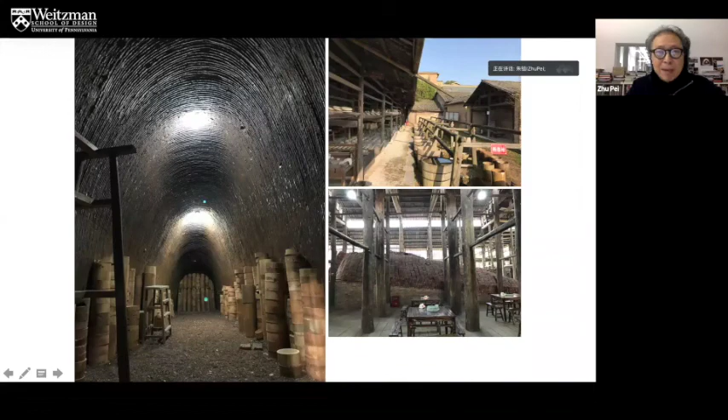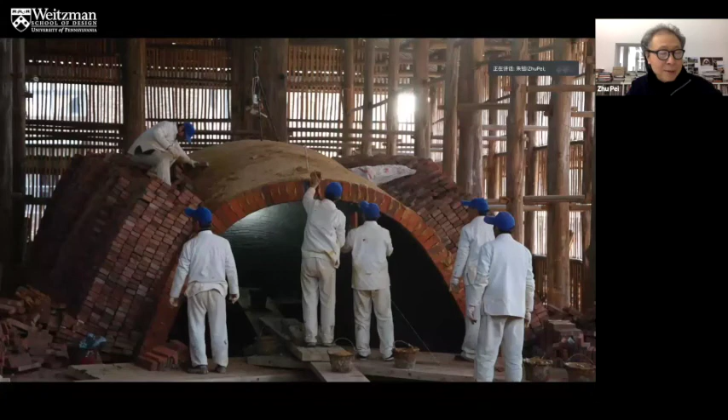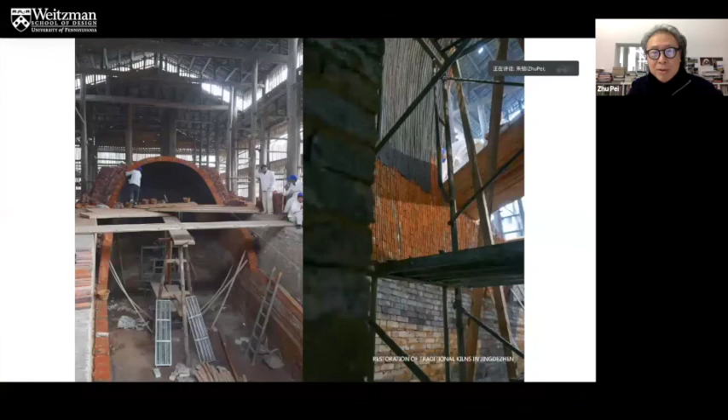This is quite interesting — when I walk around the city, especially inside the historical area, you always find a lot of traditional brick kilns. Sometimes they are reconstructed, because those kilns have been demolished maybe 80 times — probably after a maximum of 2 years they have to demolish them. So this is one brick kiln, with the craftsmen working on it. This is a construction site.

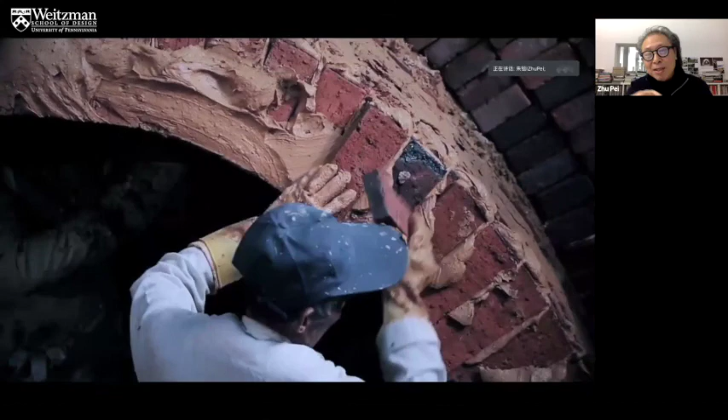I was fascinated by the way they make this brick. They use very thin bricks to create a special form, cutting through to make the horizontal layer. You can see the brick is thin and light, so they use special mud to hang the brick. They build this brick dome without scaffolding, just by hand. This is their very special technique — not like the way we normally understand how arches are built.

This kiln is not only for producing porcelain, but also a lot of people gather along this kiln area, especially during the winter season. For example, some schools move adjacent to this brick kiln in order to take advantage of the warmth from the kiln.

A lot of social activity also happens here, with many people working on various things. In some small cases, people just take a break, put down their school bag, and can keep warm all day long.

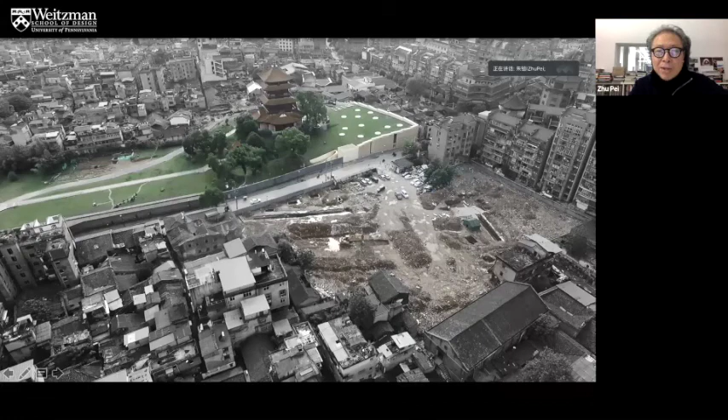That's adjacent to the Imperial Park. So this is like an Imperial Ruin Park, surrounding a lot of historical housing. And if you go beyond, you're going to see the factory, maybe from the early of last century, a lot of social housing nearby. So surrounding this area actually has a very rich urban fabric.

So this shot was taken after this museum had been done. We look from the southeast to beyond. This is the Chang River. But you can imagine if you go back like 200 years ago, a lot of people just walked through this small alley, went to this Chang River in order to transport their porcelain to the boat. They also brought back porcelain clay, wood, and so on, in order to make their porcelain in the brick kiln. So this is in general the Jingdezhen lifestyle.

But another interesting thing for this area is that those houses always have a small vertical courtyard. They have huge overhangs, small alleys, probably because this climate is so hot - everybody has to stay inside, shading, protected from the rain, and so on. I think this is an intelligent idea. Actually, they gave me a lot of inspiration.

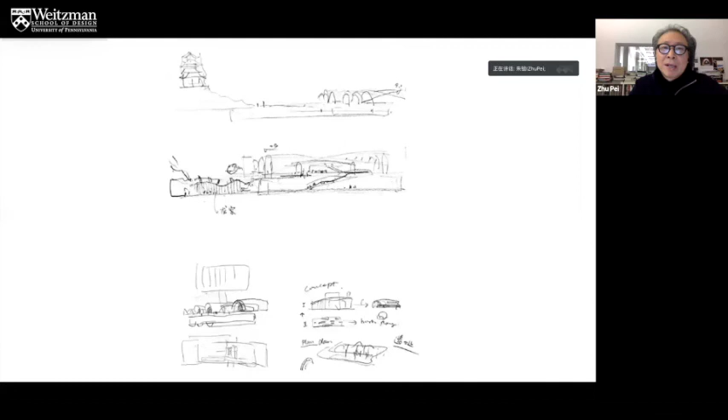So early in the concept, the idea that came to my mind was how I can catch up the sense of their brick kiln. This is going to be our project, the Imperial Kiln Museum. So this is an initial sketch to indicate what I thought - I tried to use this arched brick kiln structure to create a kind of new museum idea.

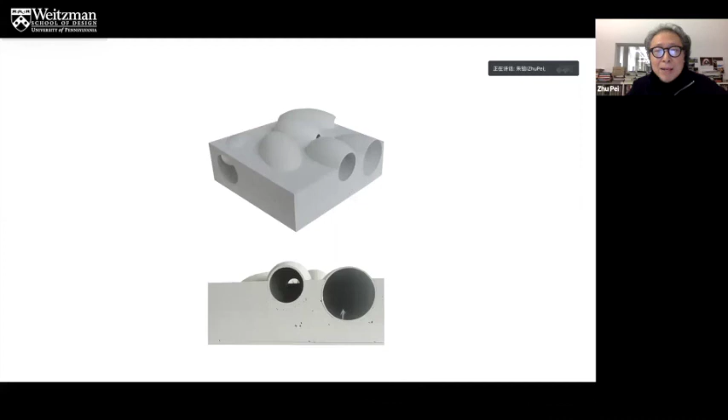So this is a preliminary idea, since we have many conceptual solutions. This is one of the ideas - we tried very hard to minimize the volume above ground. So this is our final solution, final concept for this museum.

Through this model, you can get a sense this museum somehow tries to stay small scale as much as possible in order to have a good relationship with its surroundings, like traditional housing, the factory. And so this scale is pretty much close to the traditional brick kiln in terms of scale, as I showed you before.

Now secondly, they also try to interlace it with a very rich urban fabric. This is in terms of the relationship with the urban fabric, the solution.

We have another big idea, which is I try very hard to make this design more sustainable. Also this idea may have come from the traditional housing adjacent to this area. This is like arched brick kiln layout from south to north in order to catch the summer wind, since the wind orientation is from the south. So basically you can see one tunnel after another, more like a wind tunnel, just wind can penetrate the whole building from the south to the north.

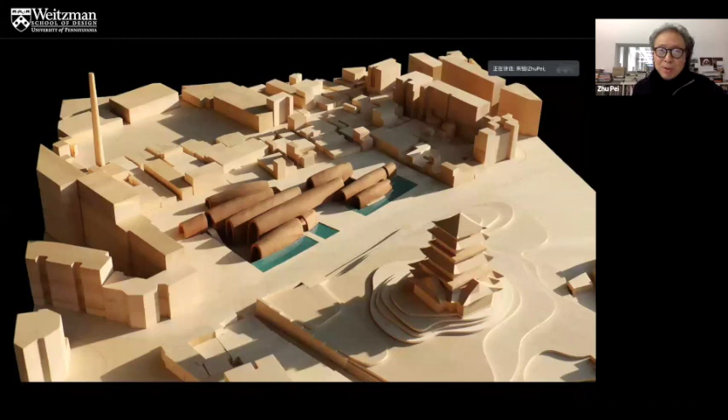Even today in the summer, we don't need to use the cooling system, air conditioning. So this is the first try to use passive energy ideas and apply them to this contemporary architecture.

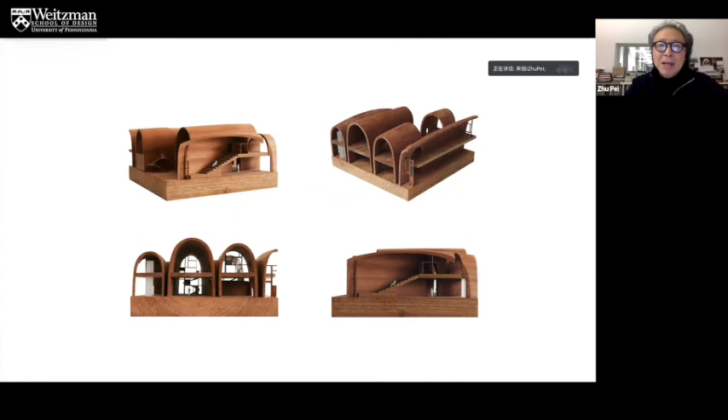Right, this is another concept model. Through the design process in the studio, we tried very hard not to rely on the computer for everything. I encouraged my staff to make models by hand instead of using the computer. So we built a lot of models, from small scale to bigger.

But this piece was collected by MoMA, definitely. So this is - I used porcelain to produce the local piece. It's more like, or it represents, our concept.

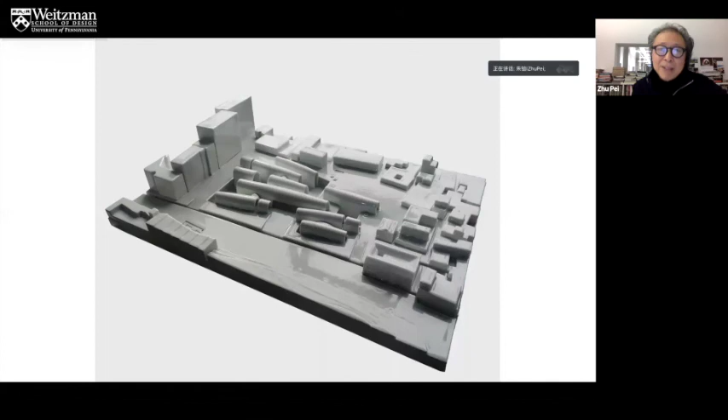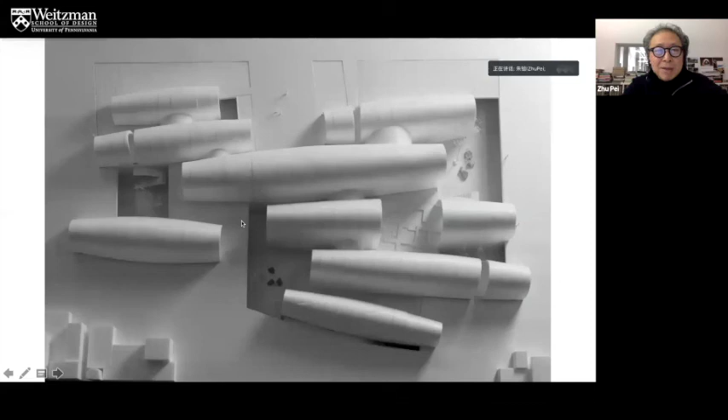You can see this building is laid out very freely in order to dialogue with its surroundings. Our site is so irregular. This is in general the big scale model, which is cut by hand. I talked to my staff.

We try to avoid using 3D print. A 3D printer can print everything, but we have to find a way to make this museum work as a system. If you look at this model, the arched structures are different not only in size but also in curvature. No one is the same, but how can you develop a system to realize them?

So during the conceptual design process, we used hand-made models, and this gave me confidence that we could find a way to build this museum as well.

So this is the major foyer and lobby for the museum. This is 2 arches, one is an open arch, another is more enclosed. This is the coffee, tea, book store. This is the auditorium, which has a separate, independent entrance. You can use it independently, pretty much at the boundary. So when people come to this museum, you can go through this other open arch to the content.

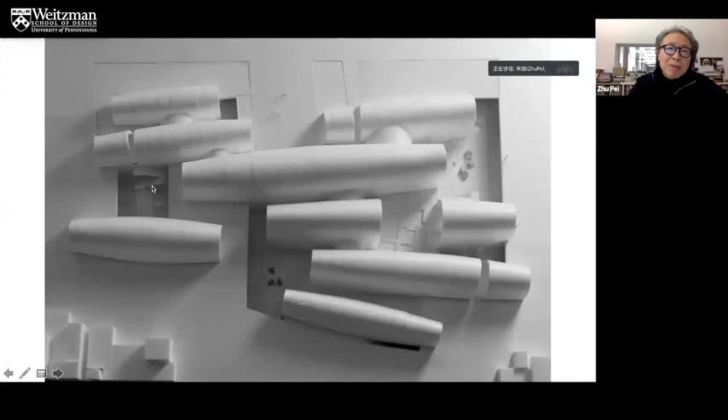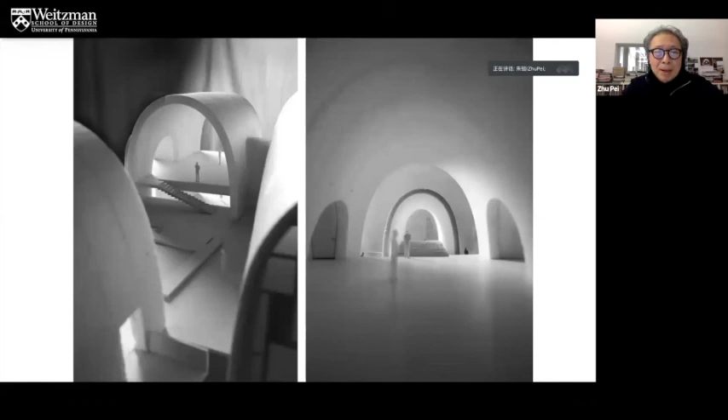You can see we have 5 courtyards, which integrate the overall museum. So this is the process, what we have done through this model made by hand.

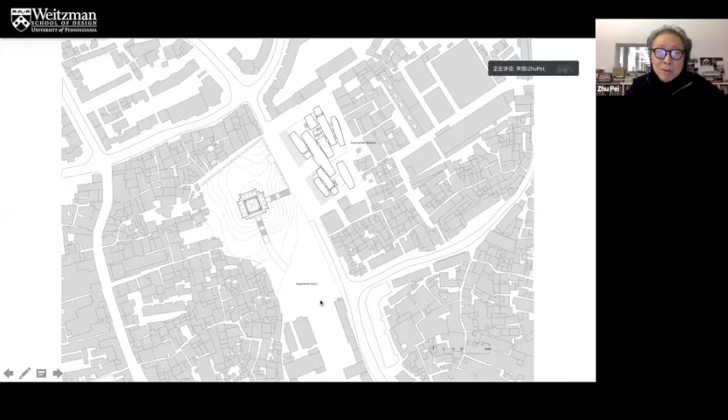This is the site plan. You can get a sense of the scale, the fabric. This is the ruin, Imperial Kiln. People walk through the ruin park, go underneath the green canopy, then flow past this bridge, past this water, and then reach the foyer of this museum.

If you go to the left side, you can start your exhibition journey, from interior to exterior again. So this museum tries to maximize the experience for people.

Try to integrate nature, not only just the surrounding view, but also try to combine with the wind, with everything, try to integrate this artificial museum with the surrounding nature and neighborhood. So this is in general our idea.

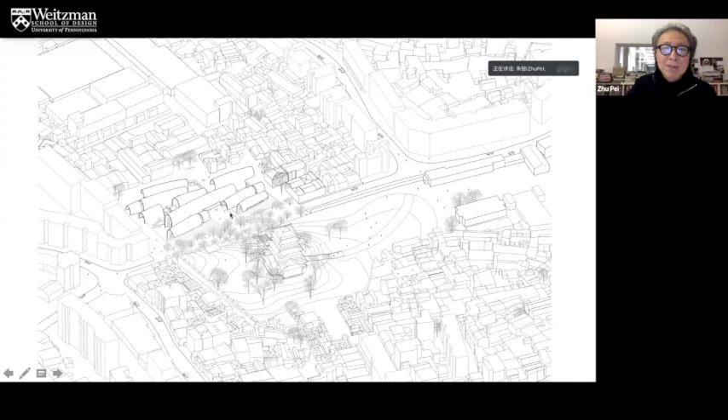If we tried to keep this ruin, it would hugely delay the construction, but the city definitely wanted to quickly move on. But I felt this would be so much more valuable if we could include this ruin into our museum.

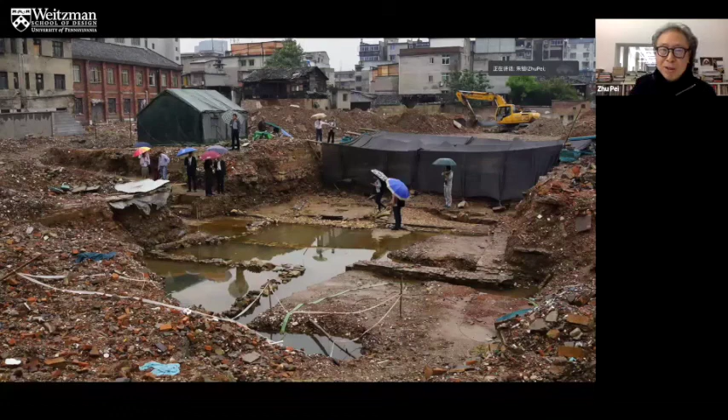So, like what I said before, we actually redid the whole design. That also proved my provision when I worked on the concept design — I tried to use the arched structure instead of a big box or a whole volume object.

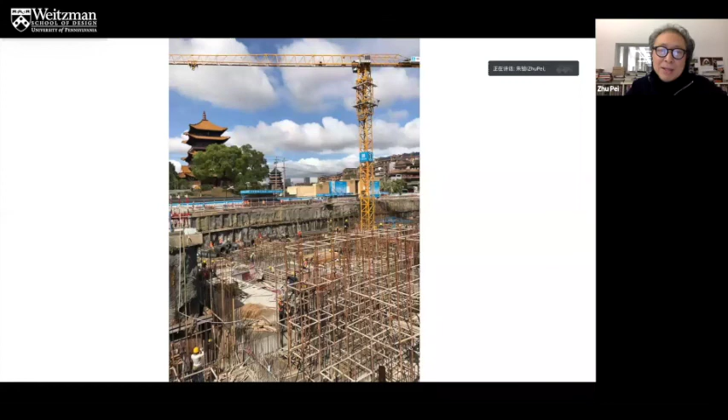This is under construction. The big challenge for this museum is how we build based on one system. This is scaffolding, which we worked on with some manufacturers and contractors to develop what I call mobile, moving scaffolding.

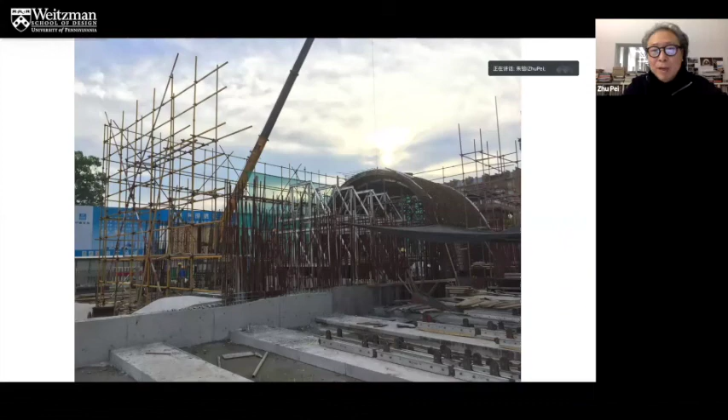They can freely readjust their size in order to achieve this curvature, this double curving arch. This arch structure is actually made up from concrete poured on site, with 2 layers of masonry brick.

This is recycled brick, like what I mentioned before. They have more than 1,000 years of tradition in this city. They use recycled kiln brick. After demolition, the brick is no longer a whole piece, so they have to mix new brick with this old brick.

This brick is so interesting — you can see there's so much in each brick, a glaze local people call Yao Han. It's a kind of effect since the brick has been burned many times.

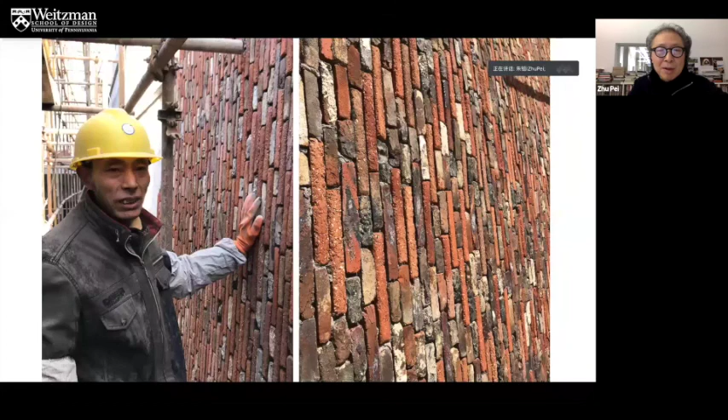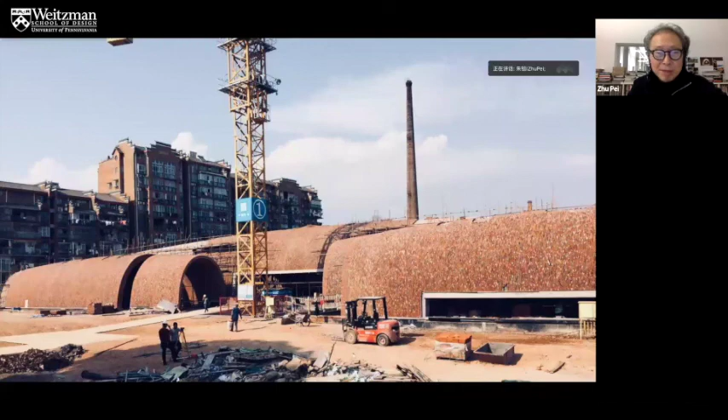So this is our construction workshop — the craftsmen work on the masonry wall. In the construction, you can see we actually have no high technology, just very normal construction methods. The special thing, which I call mobile scaffolding, is built on a track — they can slide from one end to another.

In order to always change their radius to achieve this kind of curvature, like a kiln. The arch structure differs in curvature, different size, everything different. In the beginning, nobody believed we could realize this museum, since it was so complicated. But after we developed this mobile scaffolding system, we felt it was pretty much easy.

We just use the system to build everything. So after this museum realized, we still not finished in terms of landscape, but it's pretty much open to the public in terms of this architecture. September 19, we had a very successful art show happen in this museum - Xu Bing, Xu Jianguo, Liu Xiaodong, and my work. Actually it's 4 artists whose work tried to dialogue with traditional porcelain art, to work with this kind of museum.

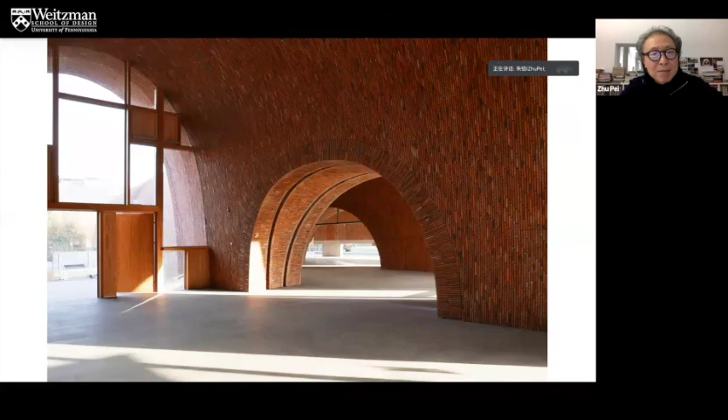On one end, when you walk out, you're going to have some surprise - you're going to see the sunken courtyard with bamboo, see beyond it a beautiful landscape and the historical courtyard house. So this is when you walk in, you're going to see this interior, and then when you walk through this glass door, you're going to experience an only-covered outdoor space, with a lot like an overhang. Those ideas are inspired by the local house idea, since they have a huge overhang to protect their vertical courtyard - even in summer, they still stay cool, very cooling. Water is going to drop right inside of the courtyard. Probably you guys know Huizhou.

The Huizhou residential is one of the beautiful typologies for the Chinese central-south area house. Jingdezhen used to be part of Huizhou, and as Alice mentioned, the Shouxian project is my culture and art center, which is also not too far from this region.

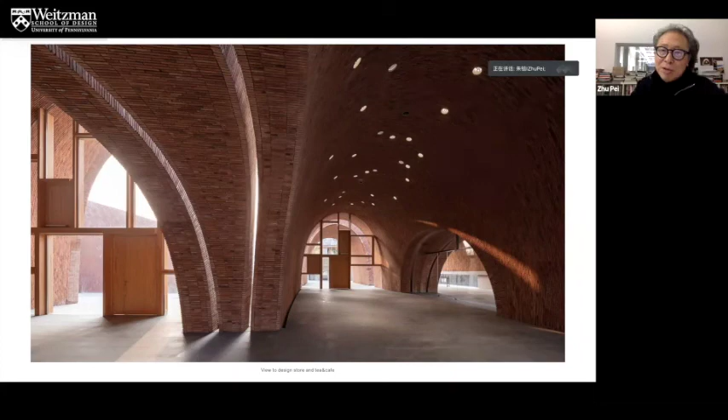So this is an open art space. I really wanted to use this space to generate the building somehow like a sponge. It's not like a solid object—it blurs the interior and the exterior.

So when you walk from the cafe area, looking north, you're going to see the water, sunken courtyard, beyond that the lecture hall, water garden, and urban housing. So even under the shade in the summer, you feel very cool—the cold wind concentrates here.

It's another idea—when you walk into this tea area, people tend to sit down on the floor with the tea, more like the Japanese or Tang Dynasty Chinese style. You can sit at a very low table drinking tea.

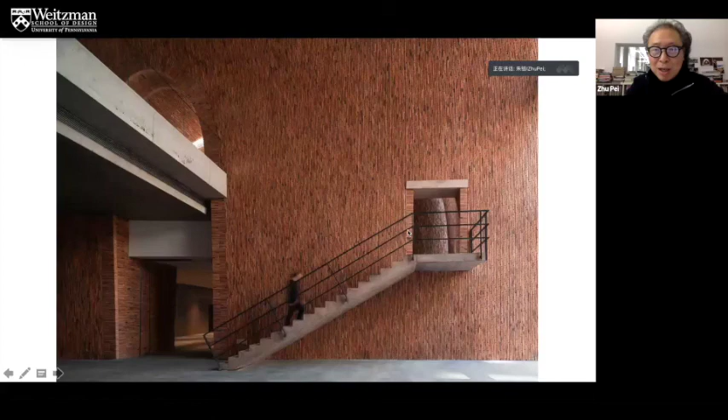The material gives you some inspiration, or when you want to touch it, you're going to see the glazed surface and the natural light. So this is the stair, people actually walk down here and then go downstairs.

Even the concrete - the local climate made it very difficult to pour this concrete on site. Many times I'd wake up to a phone call about pouring the concrete, and if there was a big thunderstorm, the concrete would become more like a Chinese painting. It's quite interesting, a very natural way of recording the local climate - the rain, the heat, and so on.

So this is what I mentioned - people going to walk up, walking down. It's like a flow, like music, right? So you always feel the surprise waiting for you. You're going to explore, wandering inside the museum.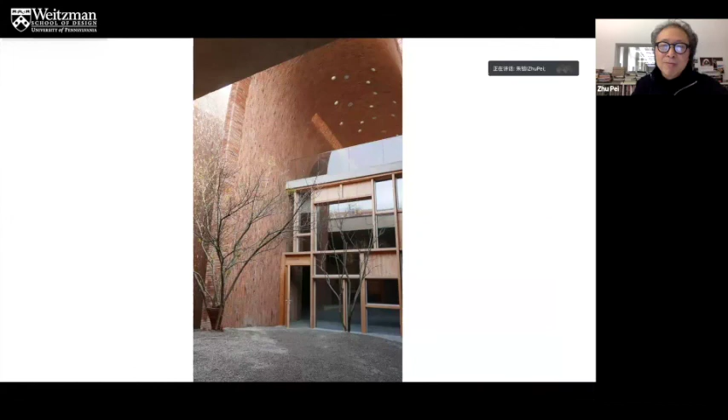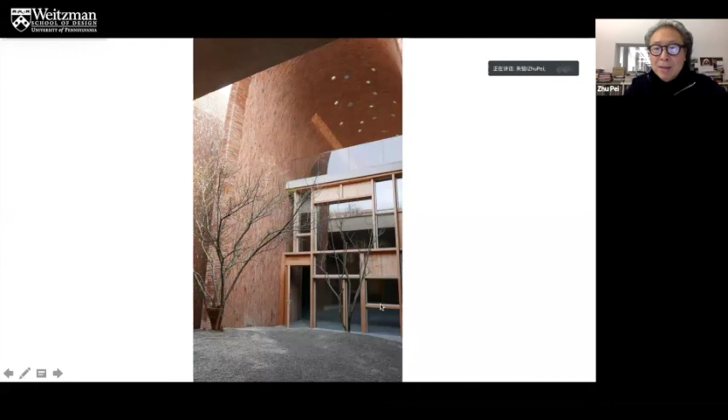So the museum, even when you go underneath to the basement, you also feel the lighting. Natural light always lights up both ends of a gallery. And then you walk out, you're going to explore a lot of public space on the top, and some people working on traditional crafts - you see the museum people really working, the atmosphere.

So this is getting late. During the night, the neighborhood has a lot of people singing, piano, but the bamboo creates a kind of sound. You feel very local, it's very peaceful.

But this museum is so unique. You don't feel this is traditional, but you also somehow feel you know this museum. You know things - local people, everybody knows the kiln brick. But you know, this is...

Somehow reflecting Chinese artistic thinking, we create a kind of thing between new and old, between familiar and unfamiliar, in order for people to engage. You bring the people to engage, to explore - you're always attracted by something.

Another idea, maybe based on my understanding - I always try to make this architecture more like a sponge, or more like incomplete in terms of geometry. More like when we look at the sky, the moon - when you see a half moon, you always expect it to become the full moon.

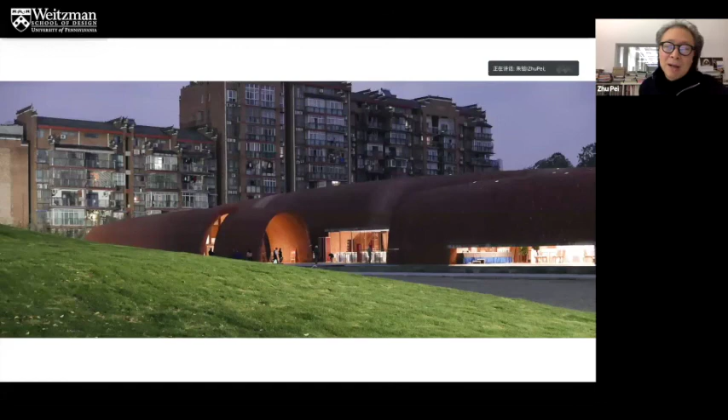More like Chinese painting - when you look at Chinese painting, there's a lot of blank space. Actually, it's not blank - they give you a lot of imagination. They bring you to engage with their composition or their idea.

So this is exactly maybe through the concept to the end - we are struggling with many things, but to be honest, this is a one-vision project. Myself and my team worked very hard, especially we spent a lot of time on the site.

We think about how we can recreate the experience among the people, the kiln, traditional kiln, and the porcelain. I consider this like a blood relationship. We try to recreate this experience - the root and the innovation are like both dynamic forces carrying through the whole design process. So this is pretty much what I try to explain, the idea behind this design.

So it's really terrific. Thank you.

Yeah, thank you so much for that. Very clear and thorough description of your project. And what better project to show at Penn than a brick-driven project, with the history of Kahn, etc.